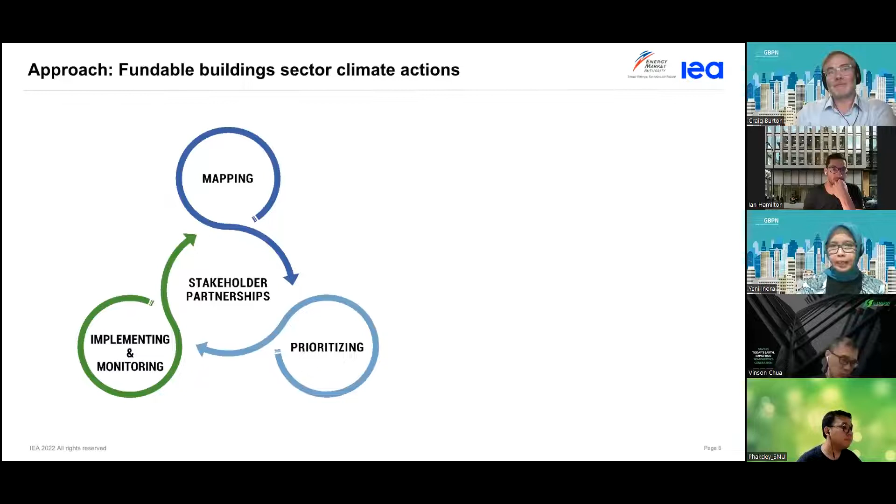Moving from that aspect, next slide please. So this is how we try to see our stakeholders and how we integrate it into our work. We have three key priorities: mapping, prioritization, and implementation and monitoring.

This key pillar is the foundation for the process, and this doesn't happen individually but happens parallelly and in a cycle. Mapping helps us prioritize, and prioritization helps us make good implementation and monitoring. But then again, as we implement the program, we need to do the same thing to restart the cycle.

So it helps us have a full loop and a regenerating loop of our work. We make sure that all the stages are well recorded and well managed, and that helps us with the process. Next one.

So this is actually how we evolve. We have these key aspects of the policy reform, and we try to break this policy reform down into clear stages and clear subjects of the process.

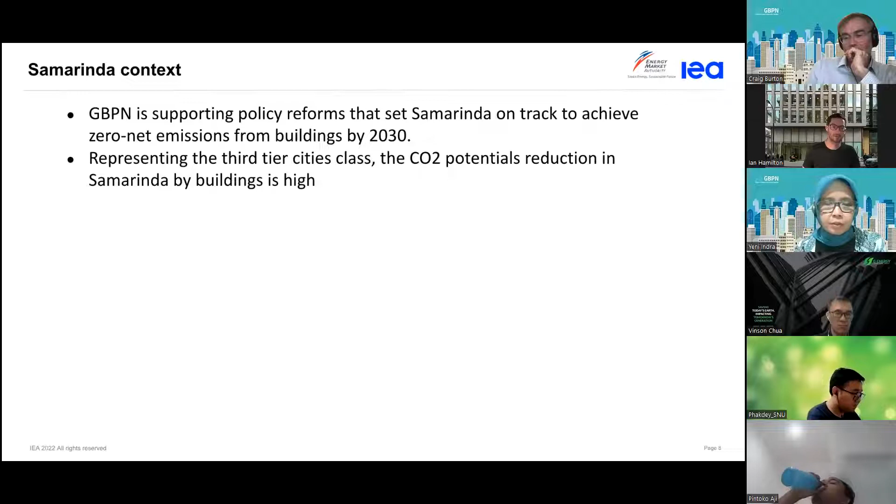One of the most important things is that Samarinda represents the third tier city in Indonesia, and third tier cities have rapid growth, and that rapid growth involves potential for CO2 reduction. That was one of the key things that led us to decide why Samarinda can be a good case for us to support emission reduction.

And next, what happened with the city is that when we start the engagement, we are aware that there's a lack of substantive baseline data and other key information related to building growth, energy consumption, emissions from local governments. It's not available. So it's not just that they don't understand, they don't have anything to move forward from that condition, and they are not aware that it was important for them to enable a clear target.

That was when we agreed with the local government that one of the key things we need to do is the baselining process. This is where the learning process first comes in - to make them aware of their situation, make them aware of their needs, and make them aware of what is the strategy to enable us to do that.

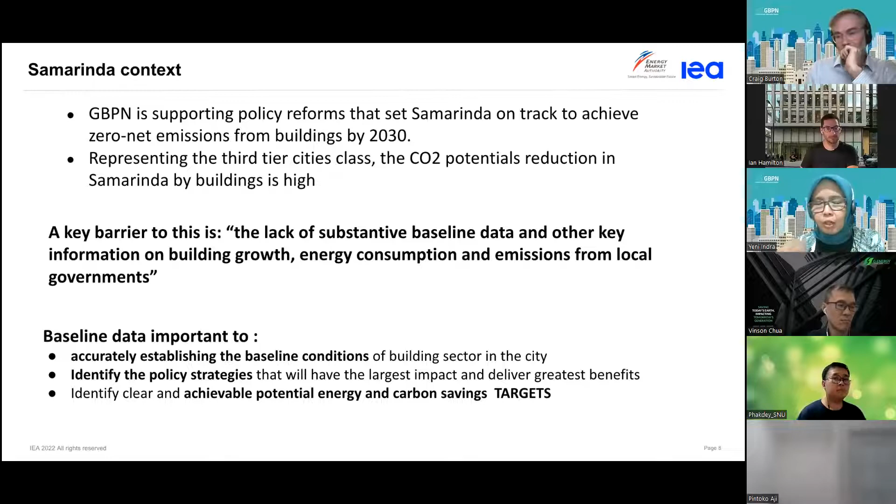The next slide is a description of where Samarinda lies and how Samarinda represents other cities, most other cities in Indonesia. This is where we really think about the scalability and replicability of this project.

From the beginning of the project, we are aware that Samarinda as a third tier city has characteristics which most cities in Indonesia have. So more than 200 other cities have similar characteristics with Samarinda. That's why we go with Samarinda, and that similarity in characteristics gives us the opportunity for replication in other cities in Indonesia.

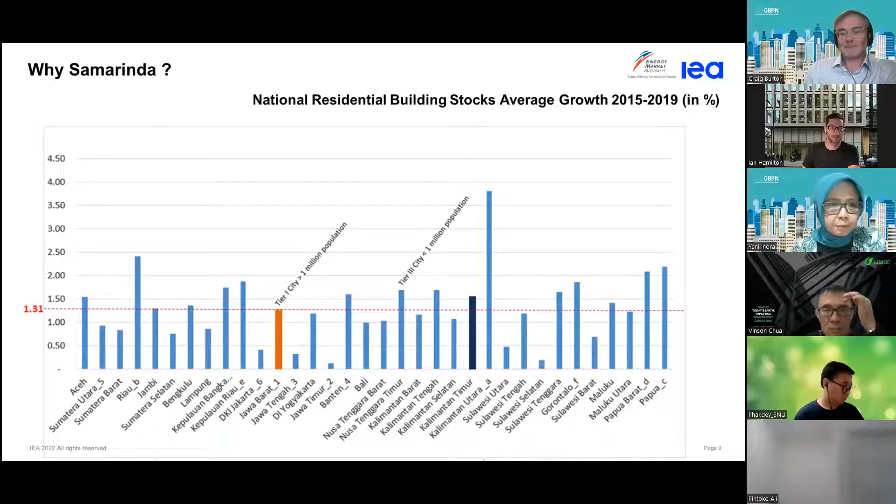As we move along with the local government, we try to identify why Samarinda needs that, because they are not aware what the necessity is for Samarinda, what the benefits are for Samarinda to have this policy reform. What we have identified with them is these key issues.

These are the key issues that the city has already faced within the last 10 years. There's been a rapid growth series, and with the rapid growth comes rapid construction - hotels, malls, hospitals and residences have actually grown more than 25% in the last 10 years.

Then there's the increase of population. They just noticed that the increase of population is directly related to the increase of demand - demand of water and energy. We have calculated that within 5 years, if they don't do anything, there's a possibility there will be a scarcity of energy.

At that point, they realized this is important for them. So rather than us chasing them, we make them realize what they need. This is how we map the process. The other thing is that Samarinda is a city that...

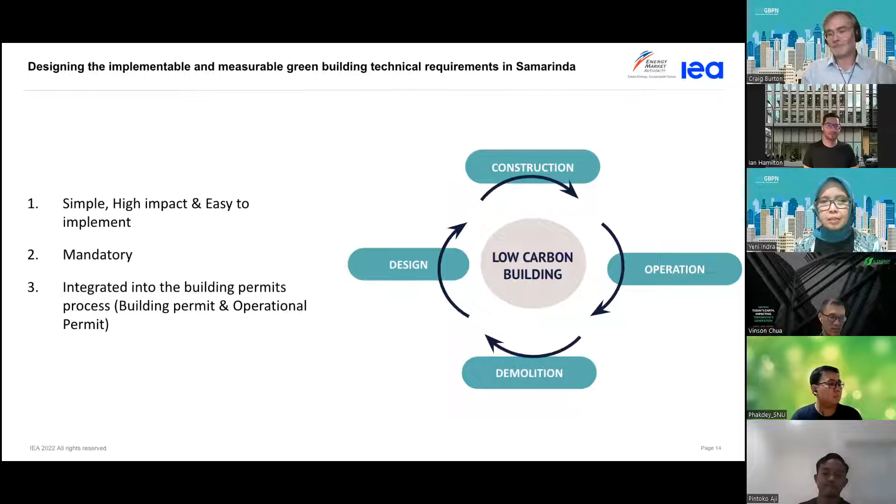And to make that happen, we included the technical recommendation for sustainable building into the existing building regulation. Before, they didn't have anything related to sustainable building - all their building permit requirements only guided them to comply with safety regulation, but not sustainability of a building.

Next, please. So I think that's all for me - that's more on the process, and I will hand it to you, Craig, to talk about the technical aspect and how we define the technical aspect with the local regulation. Thank you, Yeni.

Hi everybody, Craig here. I'm just going to run through a quick example of what Yeni talked about - how evidence-based policy making happens. As Yeni introduced, we have a process where we approach Samarinda looking for data because we want to provide facts as the basis of policy. Facts are not quite so political. And I'm going to explain how we hunted around for data.

The National Bureau of Statistics provides some information about the housing stock, but no information connected with that to do with energy use. Whereas if you look at the Ministry of Energy and Mineral Resources, which is responsible for energy, they do have a repository of information to do with demand.

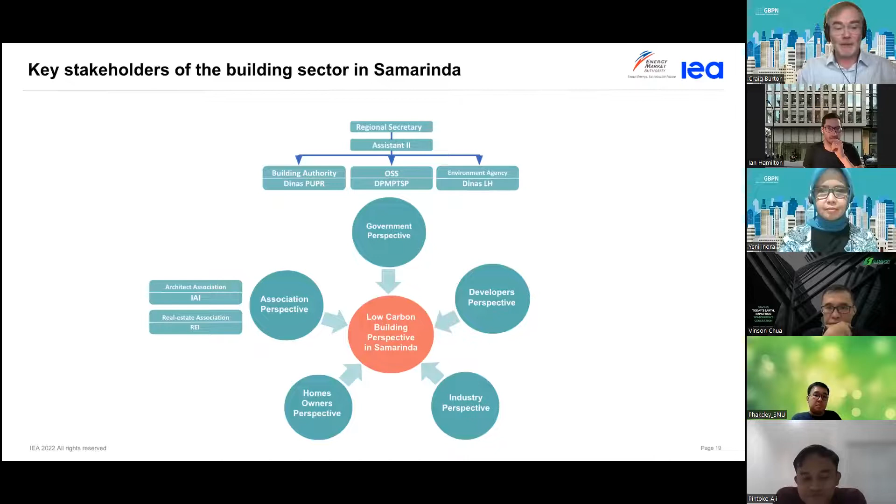Whenever you do a data collection, or whenever you set out to do science based on the collection and analysis of data, you have to admit to some assumptions. I'm quickly going to admit to some assumptions that we made. There were many more, but some important ones are that there most certainly are ways to improve building performance in Samarinda. We made that assumption. We felt that data could support guidelines, so we felt that it could be data driven.

We are attacking the problem from three different directions: guidelines for electromechanical devices, guidelines for building shell, and guidelines for occupant behavior. These were the three ways in. We felt that getting data on these three things would be adequate for us to formulate the guidelines. So this design of the intervention was to try and collect this data.

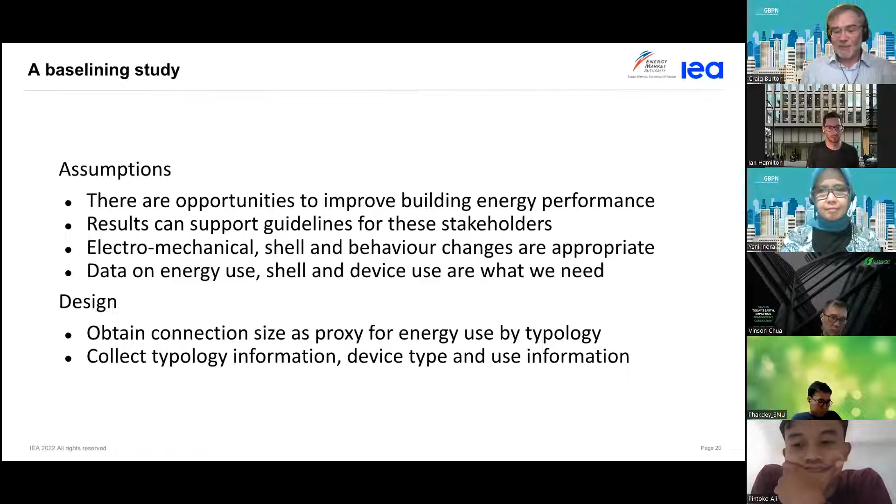There are smaller connection sizes, but everybody is scaling up. It's a place where wealth is increasing, so house sizes are increasing, energy demand is increasing, and so connection sizes are increasing. So we stuck with this group. We ignored the topmost group, which spills over into commercial.

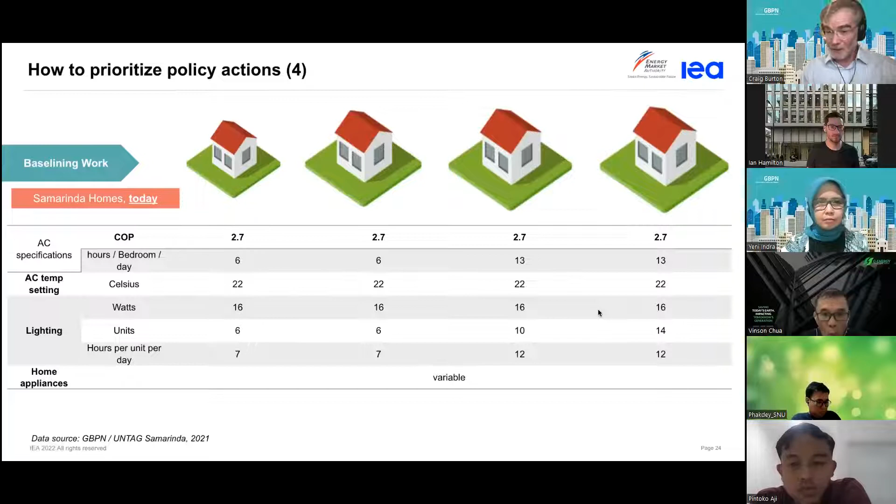We also wrote down how many air conditioners they have, how big they are, how often they use them, and most critically, what the set point was for those air conditioners. You can see here it was always around 22 degrees Celsius. They were kept blasting at this temperature, and this contributed to some of our later policy design.

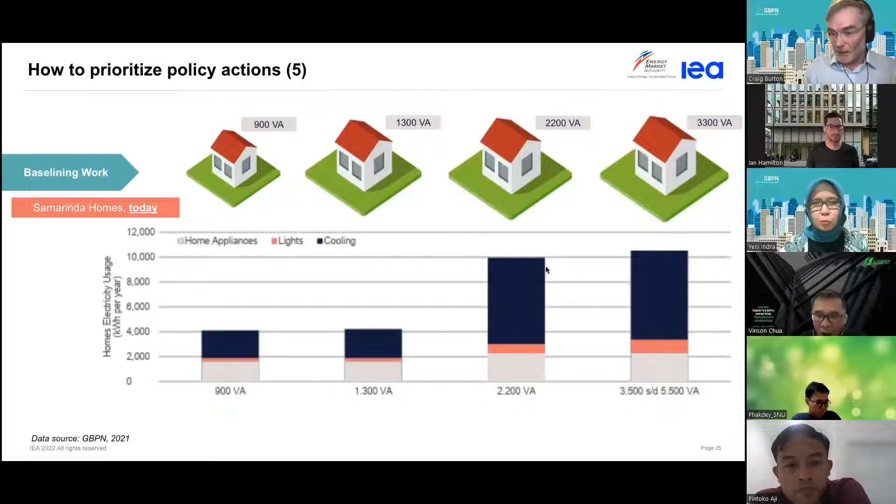Over here, this really tells you where the energy is going. So here are the increasing house sizes grouped by their connection size. It's obvious what they're spending all their energy on. It's on cooling.

And that's where we wanted to make the savings. So using these three lines of approach—the envelope, the electromechanical and plumbing systems, and behaviors—we made an assessment of what was going to work. So what's actually going to bring us a reduction in energy demand? This is passive demand side management.

What can we do to the building that is going to really reduce our demand and thus the CO2 footprint? It's got to be affordable—no fusion reactors allowed, right? Whatever we suggest, it has to be inexpensive. It needs a reasonable payback period, and it needs to be the kind of thing the government can back with incentives. Ultimately, is the local market ready to deliver this? Are there local skills available to install these things? Are the solutions practical and simple and able to be deployed?

The intersection of this is where we designed our guidelines. So, impact on building performance—the winners are a new installation technique for walls that we looked at, as well as more efficient air conditioners.

You may have noticed before that the average performance of the air conditioners was a COP of 2.7. If you increase that to a COP of 4.2, that is a huge improvement. There's also some improvement in replacing CFLs with LEDs.

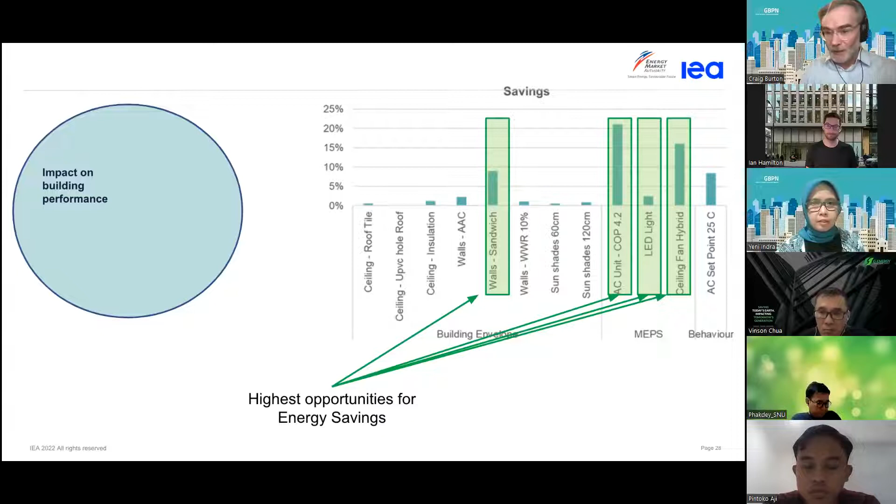And then there's quite a lot of promise in a thing we call hybrid fans. A hybrid fan is a fan in the center of the room that comes on every time you turn on the air conditioner, and by circulating the cool air, it improves the coefficient of performance of the air conditioner.

So we also looked at the financial feasibility. When we put the colored boxes on here, unfortunately, more heat resistant walls are much more expensive. They have a huge upfront cost and a long payback period.

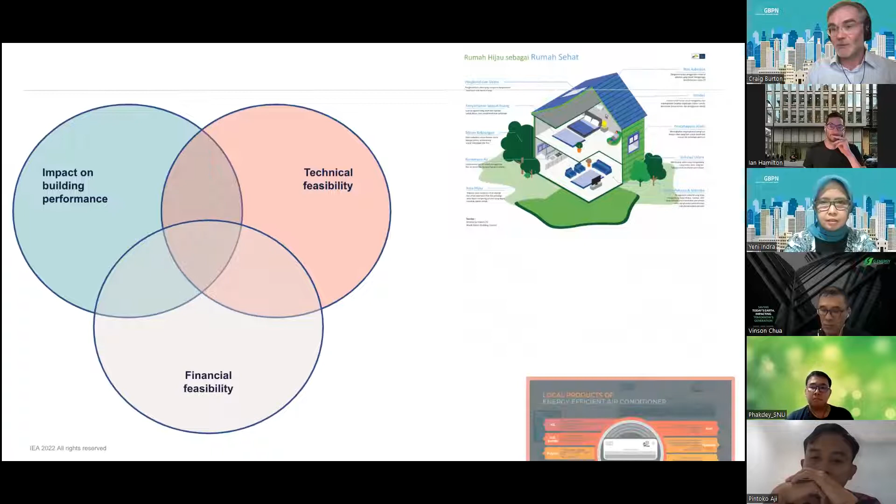Finally, what can we actually build? Can we build it? Looking at the typology of residences in Samarinda, there are already performance changes being implemented, and renovations are taking place. Many different things are being improved, so there is great capability to do the kind of work we want to introduce. They already have standards and public education about air conditioners, and as I said before, the upgrading to efficient lighting.

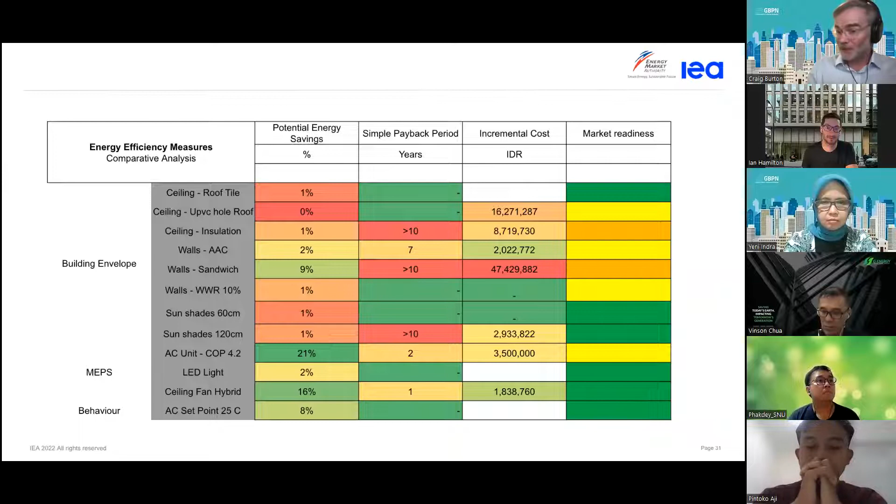So if you lay all this out in a really tidy little table, you can see what's going to provide the best energy reduction, which strongly identifies reduced carbon emissions, what takes a long time to pay back, and what costs the most. I've put little green boxes there, which were the envelope, machinery, and performance changes we were going for, and these formed the basis of our recommendations.

Keeping in mind that we felt it was very important to pick winners—this government was the earliest government that we engaged with—we wanted to choose things that were going to work, with the assumption that we might be able to make more recommendations in the future to increase the ambition of these interventions for buildings.

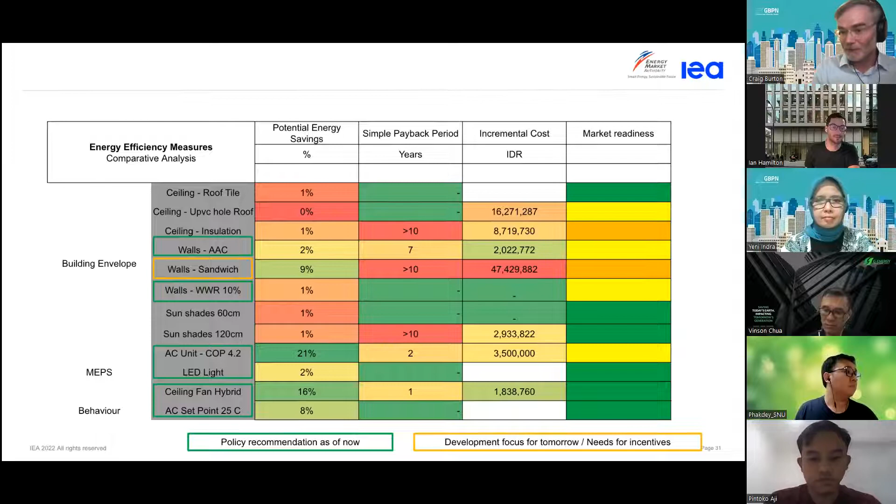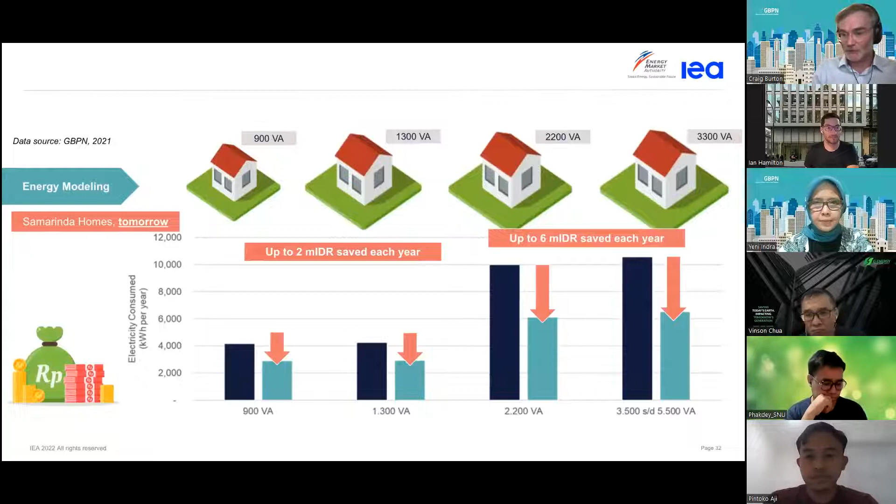And if the government adopted these recommendations, this is what the modelling shows us. The light blue boxes are the improved energy demand. Obviously, when you have more demand and more opportunity for savings, you have greater reduction. 2 million Indonesian rupiah is about $140 US, and 6 million is about $400 US—and this is a substantial saving for these lower-income households.

Accordingly, because there's such great savings at the larger end, up on the right here, the payback period is shorter. So the savings are greater, the time to pay back is shorter, which really means that the bigger places are more attractive for these regulations. But that's okay, because everybody is migrating to larger houses, so we're going with the tide.

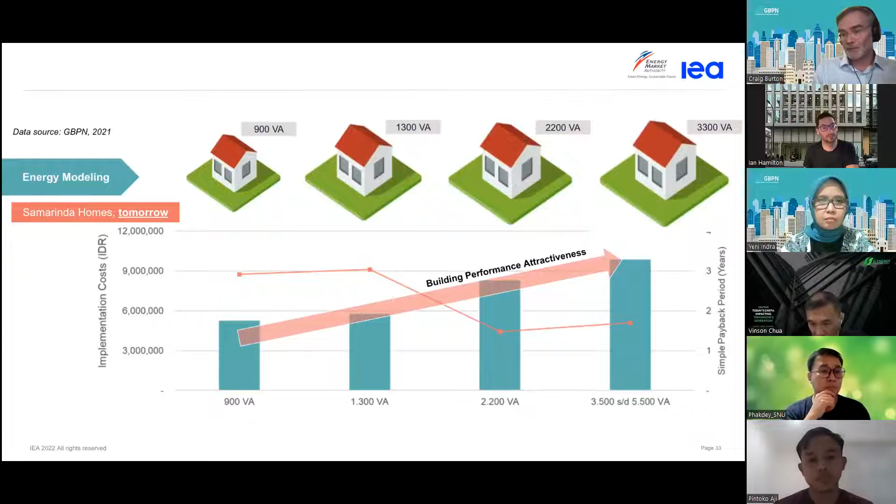But here is a surprise ending to this presentation. The surprise is that in the same way that only 5% of buildings are built by architects, in Samarinda, only about 1 in 5 building projects request a permit, and then only about 1 in 10 building projects receives a permit.

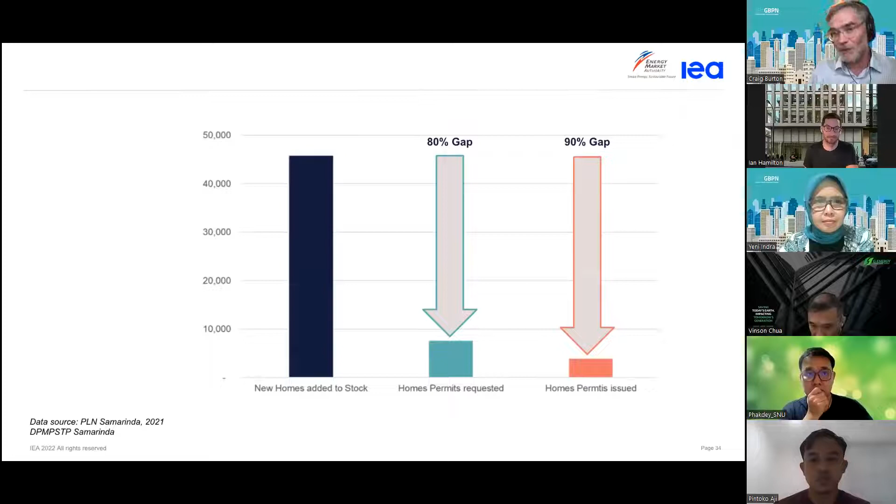The difference before and after the regulations is very small if we only change the building code. So what are we going to do? The answer is to basically bring about several changes at once. First, we have to go broader than the building codes. We need to involve the government in understanding that changes must also be made to bring people to register building permits.

And the problem with building permits, especially new ones, is it just looks like more regulations. So there needs to be administrative reform. The other way we're helping this government is with general outreach and education on how to benefit from higher performance buildings. We've written some standard operating procedures, again aimed at administrative reform - speeding up the permit process, making it more lightweight, hopefully cheaper, and then finally targeting the use of materials.

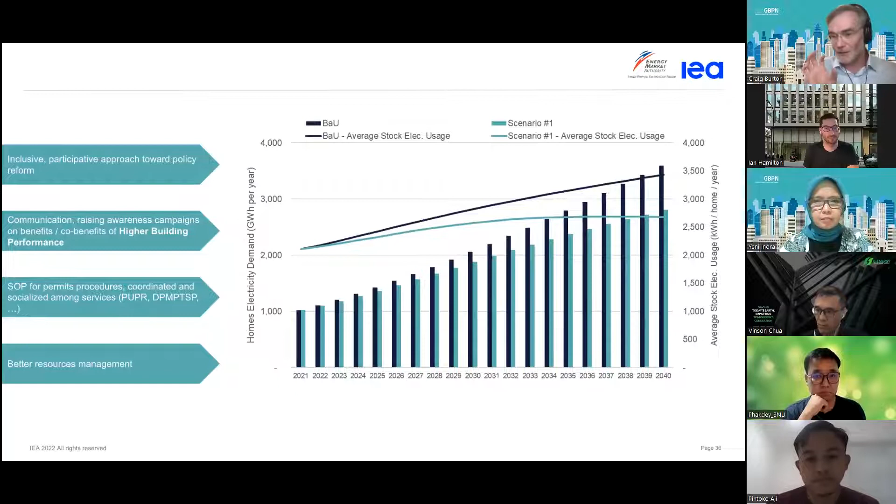If these broader policy package changes are also adopted, you can see that bottom curve there starts to really come down. So the more we can change the whole ecosystem around building regulations, the deeper the improvements. I'm going to hand back to Yeni now, because it's very important when we go step by step that we acknowledge the successes we make at each step.

So what's this, Yeni? Tell us. From all the process that Craig has already mentioned, this is the result - this is one of the good things that come up from the process. It's not our work, but actually the government of Samarinda's work. They already enacted a regulation that supports sustainable building and energy efficiency in 2021.

Based on this regulation, they will implement sustainable building requirements into their building permits. This is also, again, our opportunity to provide support for the local government. After this process, we try to identify what are the further needs that the government of Samarinda has toward the implementation.

From the discussion, we are aware that implementation is not as easy as we thought. Even though all the aspects are simple, measurable, and implementable, the implementation still has challenges. Based on these challenges, we agreed to provide further support based on their request.

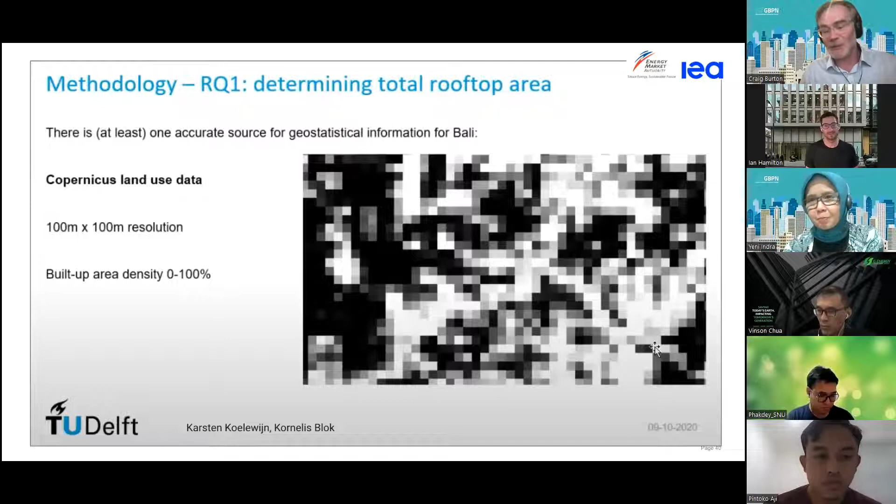This was done with TU Delft to work out the potential for solar in Bali, and we projected that for all of Indonesia. The numbers are enormous, but we don't quite have time.

So I'm just going to sum up by saying that the solution is to go broader than the building codes. Now we've done standard operating procedures, and we'll do guidelines, and we'll provide more government support for the entire ecosystem around performing buildings. Administrative reform around permits is, I hope, the main takeaway. You might remember from this presentation that you can't just reform one thing - we have to make the whole value chain work.

I didn't quite get to talk about solar or grid impact, but this is what's coming. This is what's coming next.